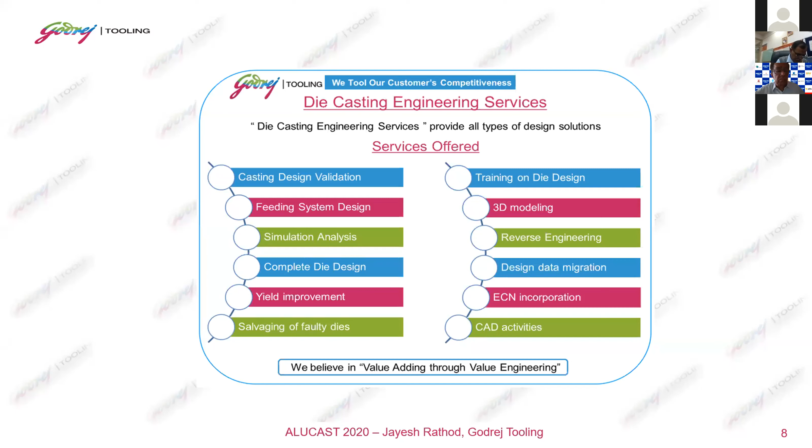We are also sharing our learnings through engineering services adjacency to enhance capability and technical know-how of fellow organizations, and we provide pre-engineering services to mature product designs by R&D centers of OEMs before release for tool development. We also provide tool management services to impart art and science of die maintenance.

Coming to today's topic, changing customers' requirements and triggering technological transitions. I have divided this into two parts. First, let us understand the changing customer requirements. In line with our mission of building customers' competitiveness, we have to look at the bigger objectives that our customers have to pursue and align to their needs.

Our customers are pursuing environmental degradation issues and global warming, conserving earth materials, clean air, and safe products and operations. In die casting, we are mainly aligned to the auto sector, so today's discussion will be based on challenges faced by them and how we can help them achieve the set objectives. There are 5 ways: zero emissions, better fuel economy, weight reduction, resource saving, and minimal effect on environment. Let us first get to know what is causing the changes in the automobile industry.

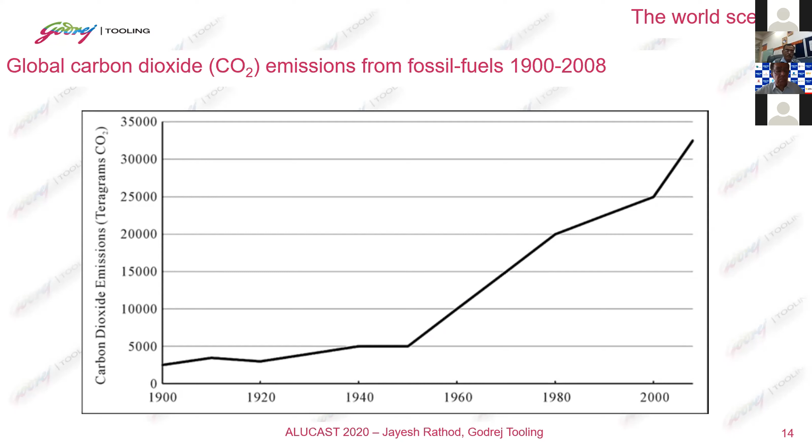The effect on environment due to CO2 emissions started quite long back. If we track it since 1900, for a whole century, there have been carbon emissions. 1 teragram equals 1 trillion grams of carbon dioxide released in the air, and in a century it has increased 13 times, causing enormous impact on planet Earth and living creatures. This extraction of fossil fuels in the last century has damaged the environment irreversibly.

In order to control the damage further, accelerated stringent norms are being enforced. We can see how BS4 to BS6 norms came into force within 2 years with bigger improvement objectives, in the range of 25% to 68% and 82%. These were drastic targets, and industry has responded well and achieved them. But this is not sufficient, because fuel economy also should go up.

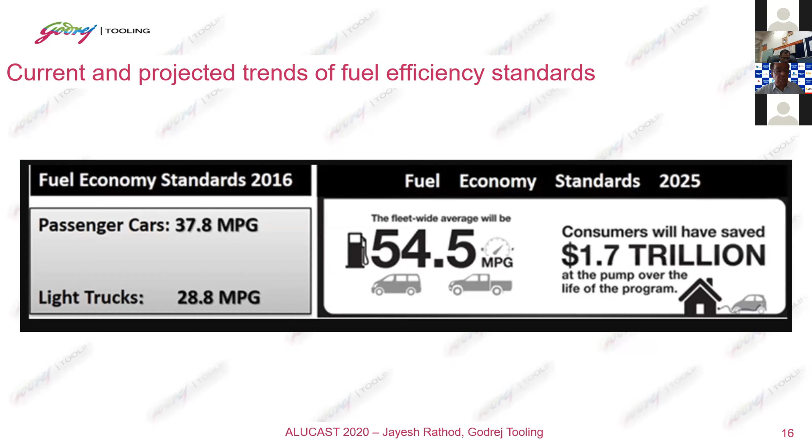In 2016, for passenger cars in the USA, fuel economy was 37.8 miles per gallon. Now it is slated to reach 54.5 miles per gallon by 2025. Similarly, more stringent targets apply for light trucks. So 45 to 90% improvement is needed with respect to fuel economy.

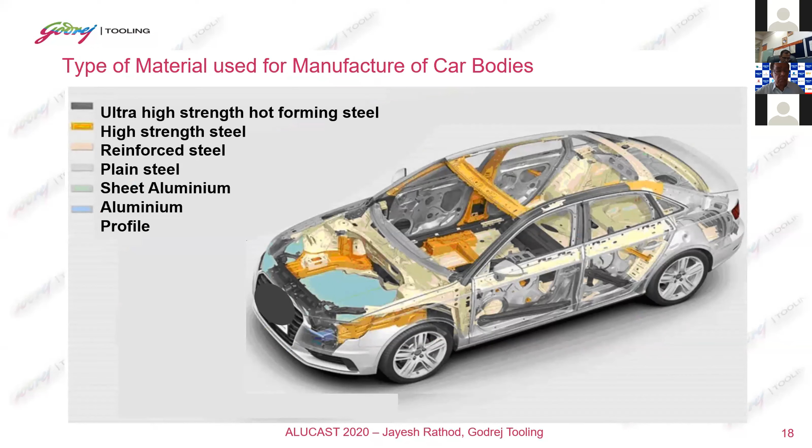If we drill down further, we can see the type of material used to make these body structural parts: ultra high strength hot forming steel, high strength steel, reinforced steel, and very few aluminum profiles. This was the case around 3-4 years back, and the contribution of aluminum alloy was only in the range of 9%.

This 9% was what was available to us in aluminum die casting to contribute to automakers. Moving to weight reduction, we can see how each auto OEM has responded to this requirement. The initial saving was 50 to 100 kg per vehicle. Now it has been targeted to 200 to 325 kg - an improvement in the range of 172% to 580%.

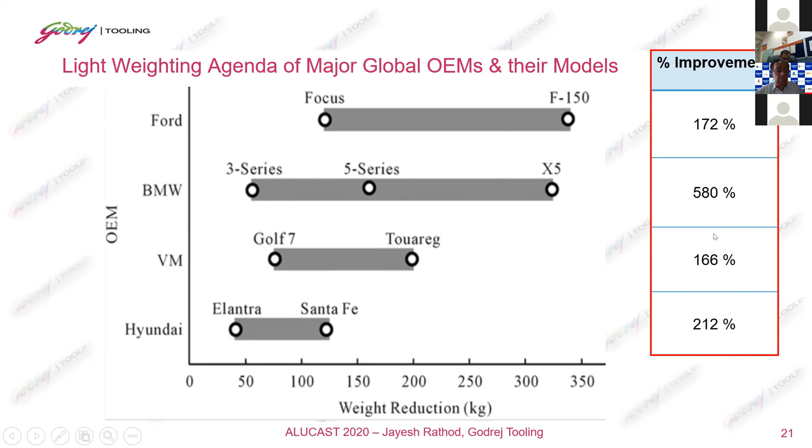These are very aggressive weight reduction programs being pursued by auto OEMs. Looking at what's happening in our country, I tracked down examples like Honda, TVS, and Hero - the difference between old models and BS6 models. We can see weight reduction in the range of 1 to 10% has been done by all the two-wheeler OEMs, most aggressively by Suzuki.

10 kg of extra flab has been removed, achieved by making the engines lighter by 6 kg. It's a huge tall order to reduce engine weight by 6 kg. Based on this, these actually form the challenges to the die casting industry. I drilled down further into how this engine weight can be reduced.

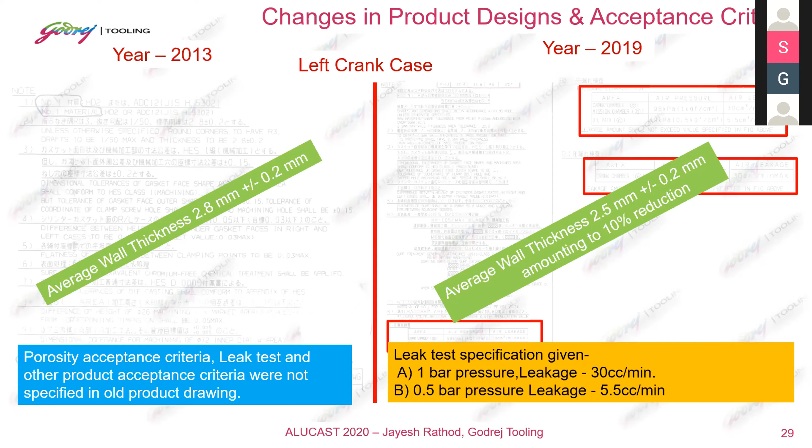Looking at the average wall thickness of the left crankcase of a two-wheeler, it was 2.8 plus minus 0.2 - that was the tolerance given in 2013. Now it has come down to 2.5, around a 10% reduction in section thickness. You can imagine what the total weight reduction will be with respect to this.

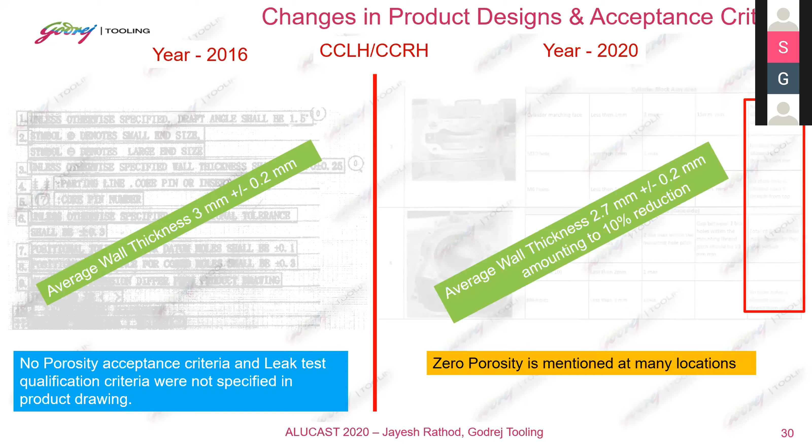Earlier, the porosity acceptance criteria was not so stringent and was never part of the contract. But currently all auto OEMs want leakage testing done, and specifications have been put on paper as order conditions. These are figures from another two-wheeler maker, and here also we see a similar story - around 10% reduction has been planned, with a very strict norm of zero porosity in the CTQ areas enforced.

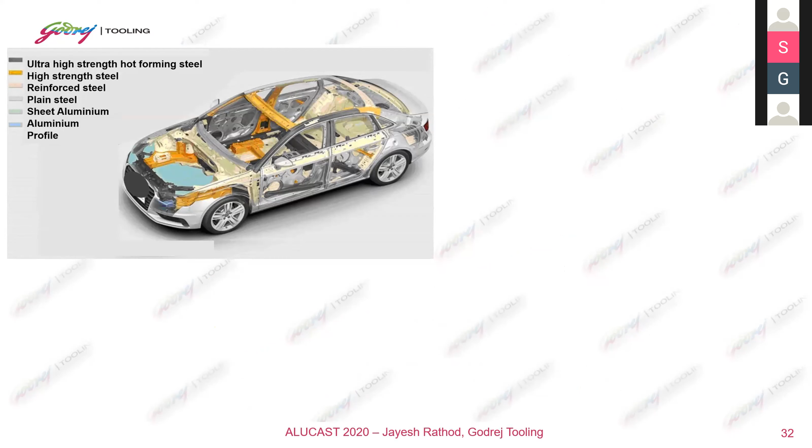If we look at here, it shows mainly aluminum derivatives or aluminum type of components, which will contribute around 58%. And these are the more radical steps which have been decided by auto OEMs to achieve the type of weight reduction they have planned. It sounds as sweet music to we all in die casting, but it comes with a lot of riders and a lot of challenges.

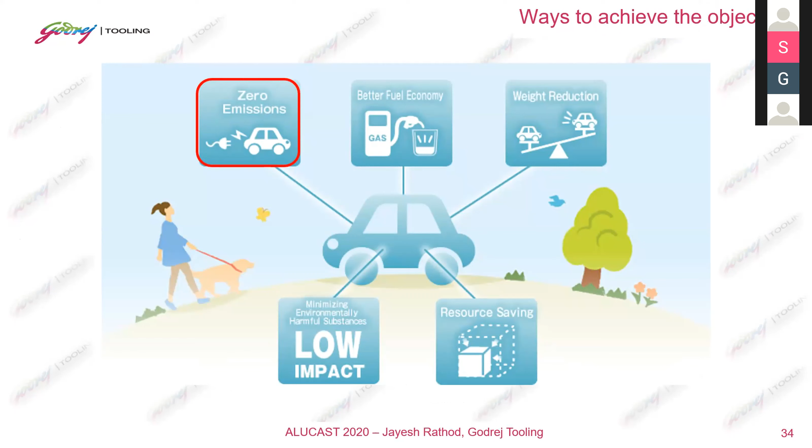So next target by OEMs is zero emissions. Zero emission - whenever any IC engine is there, some amount of emission will be there, we all know. But when the target is about zero emission, then I had gone through a detailed study that we are contributing mainly to parts of IC engines in aluminum die casting.

You might have seen in today's Times of India a big single page advertisement by Ather 450 Plus. That is giving us an idea of what is going to come in future. Now this is a study done by Bloomberg that IC engine is going to be history, because the contribution of IC engines will be very low in near future, and it will be quite subdued also, and it may become obsolete, and it will be replaced by electric vehicles.

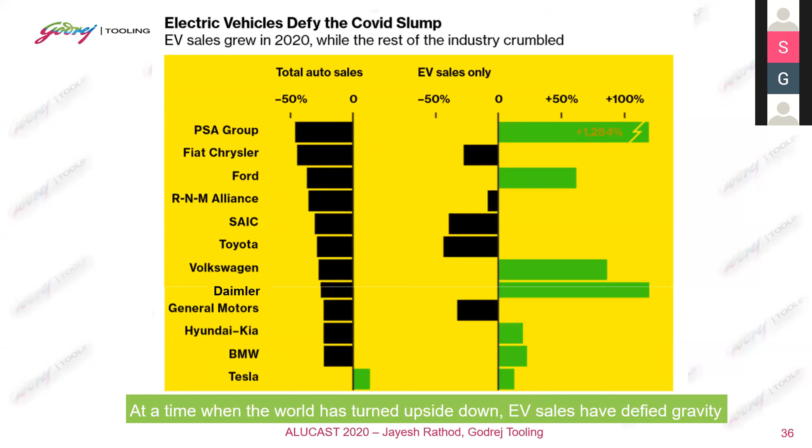So I thought let us look at what is happening for EV sales. Globally, if we can look at it, the silver lining for EV is that even in this pandemic, when the world has turned upside down, EV sales have defied the gravity and pose a strong growth path here, even though it's on lower volume, but people are showing more and more interest in this pandemic situation.

So I try to capture like what is happening in India. In India, the EV market is totally different, because 90% of Indians are traveling on two-wheeler, three-wheeler and buses. And these are the larger sector where government will be imposing stricter norms and encouraging industries to develop more and more EV products here.

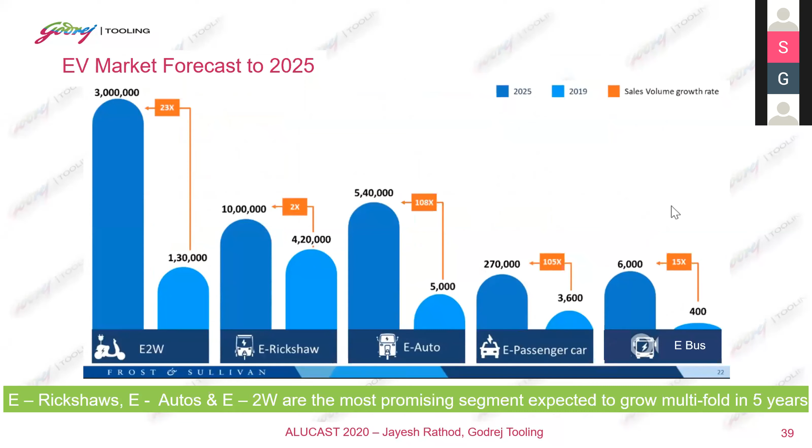So EV will grow in India, especially by 2025. And also we see that e-rickshaw will have a strong business case, and car and buses will have more time to wait until the single charge kilometers are enhanced. And we are seeing that there is an upsurge in electrical two-wheeler market - Ather, as I mentioned today, then Bajaj Chetak, we all know, TVS, SEG Automotive, and Ola Electric Mobility.

So if I look at what type of parts will be needed, especially with respect to aluminum casting - those are currently battery boxes for two-wheeler being developed in the country. And some portion of structural parts for two-wheeler are being developed, but in a major way, we will be seeing this demand for these type of parts by 2023 to 26.

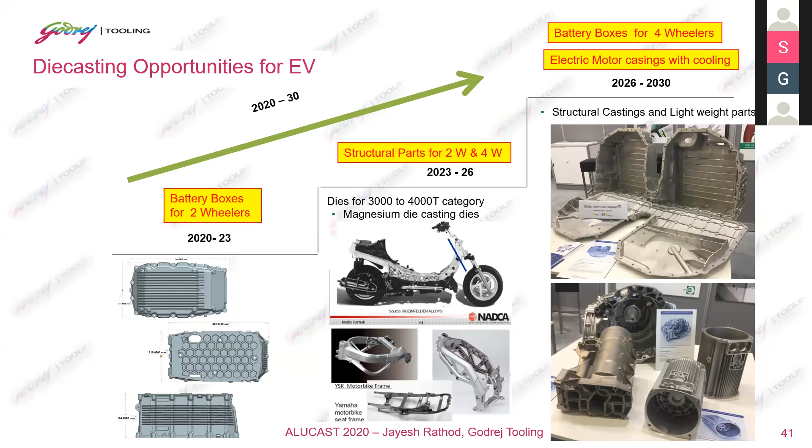In the meantime, we will also be enhancing our capability to serve battery boxes for four-wheeler, such large type of castings, and electric motor casing with cooling arrangement inside. So that makes castings quite complex to achieve. And if we think that it may get advanced more than expected - these time periods were derived around 2 years back, but we are seeing that the way the market is moving, we may require to tighten our belt and capability quite faster than expected.

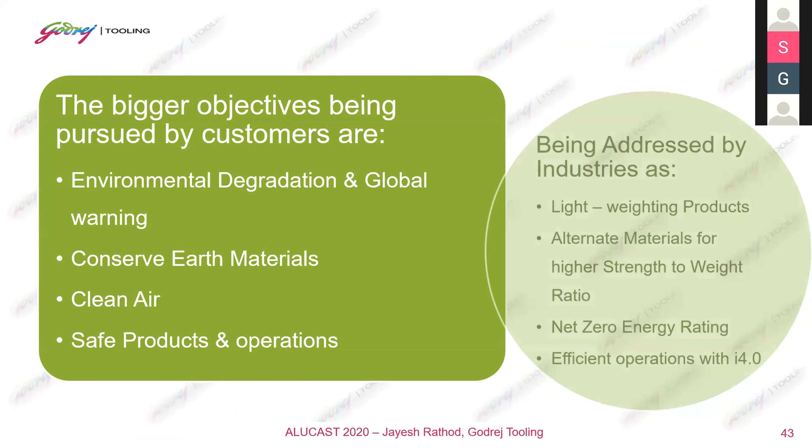So these are the bigger objectives, as I mentioned, and how industry is responding to it is with lightweighting products, alternate material, net zero energy rating, and efficient operations in Industry 4.0. So we have to see what it entitles us and how we can trigger these technological transitions in our favor.

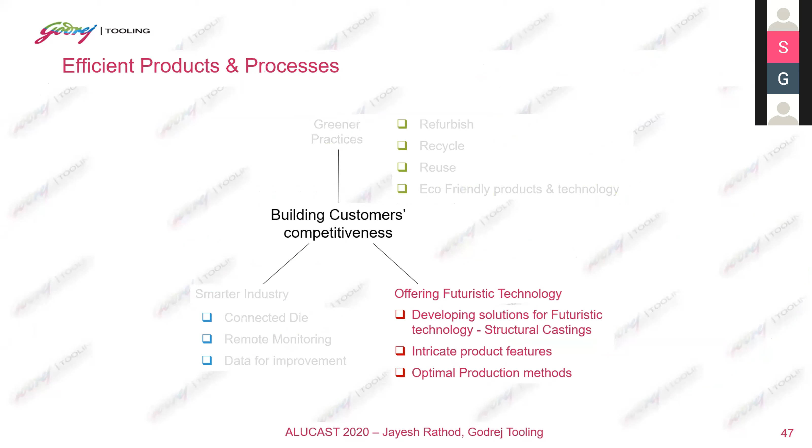So now coming to the second part, that is triggering technological transitions. During past Alucast conferences, I talked about greener practices and smarter industry solutions. And today I will focus my presentation on offering futuristic technology, and that is for developing solutions for structural castings.

So structural castings process chain is shown here. It is having some more steps added, which have been marked with red boxes. Alloy preparation becomes a very critical phase here in structural casting. Then treatment like degassing, concealed molten metal metering system, vacuum systems - these are the newly added steps.

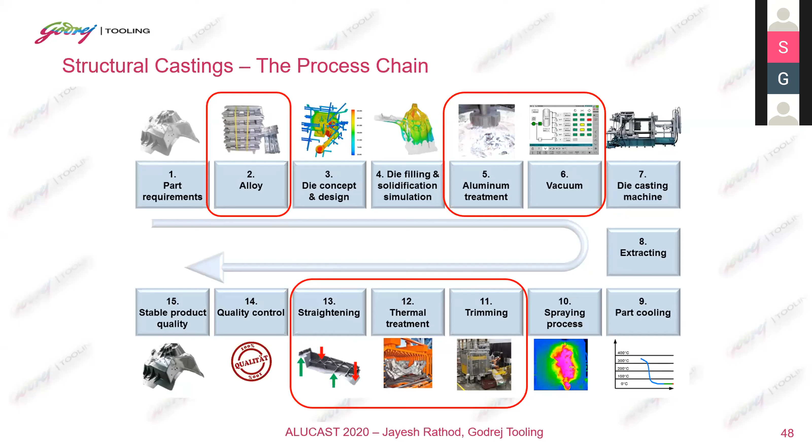And in post casting, then trimming, thermal treatment is of course everyone is aware about. And straightening - if the part is thinner and longer and having varied section, then there will be a lot of warpage. So we will have to correct that also, so as a process, that step may be required.

The structural casting alloys are characterized by higher elongation ratios. Currently, elongation ratio is 0.5 to 1.5. But for crash-relevant and strength-relevant applications, it should be more than 10% and 7%.

So we should understand the specific characteristics of structural alloys. Structural casting has to be thin wall casting with quite a larger area, and it will have complex ribbing structure as shown here, and it should bear static and dynamic load requirements. In order to impart better mechanical strength, the alloy should be heat treatable.

That is a necessary condition. Weldability and riveting properties will be an additional advantage. But when we look at weldability, it requires porosity-free casting, because even pinhole porosity will not be allowed here. And the lower Fe content will be tough to handle during filling and ejection stages.

It is mentioned that lower Fe content entitles to die soldering, and that starts creating problems for us, because a lot of warpage can be seen, or casting may not be able to come out of the dies smoothly and easily.

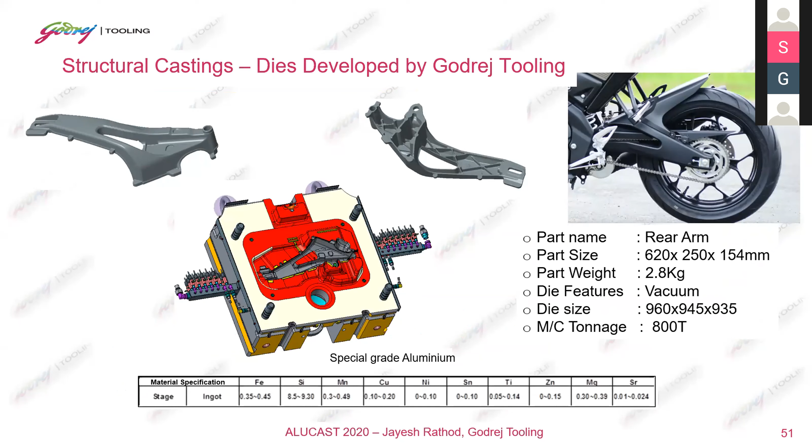Just want to share that in Godrej Tooling, we have developed structural dies for a structural casting part for two-wheelers. This is again a load bearing part, and the grade of aluminum is quite different than what we use in ADC 12. So how can these challenges be met?

If you look at what technologies are available with us, so that we are able to meet the specific requirements of structural castings, it starts with vacuum die casting technology.

The vacuum die casting technology, why is it to be employed? Because we wanted to have zero rejections, and we should address all the quality parameters of complex castings, and achieve porosity-free castings during trial and production run.

So we will show a small video, just to depict how the vacuum technology works. In the first phase, that is metal pouring. It starts off as a slow shot.

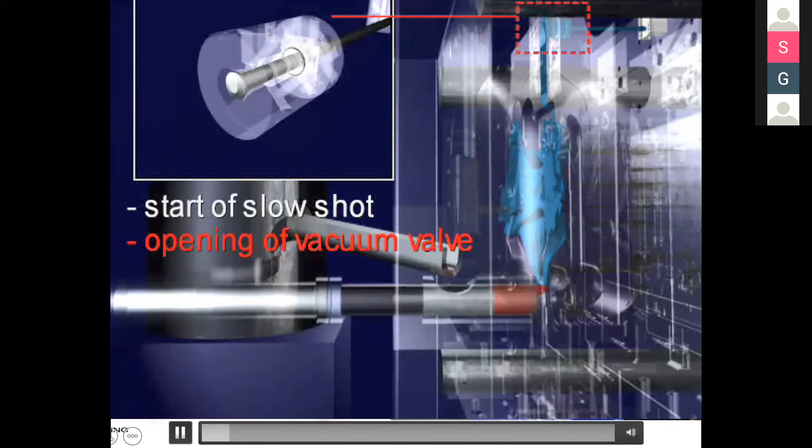When the shot sleeve is completely sealed, then the vacuum valve opens and sucks away all the air inside the cavity. That evacuation happens at the other end through the chill vent in this case. Then closing of the vacuum valve, and then start of the second and third phase, which is the faster phase. This is how vacuum technology works.

I would like to share a very interesting case study for the component and die developed by us. Originally, it was an LPDC part with very heavy and thick sections, owing to the constraint of LPDC as a process and also the product requirement with respect to load criteria.

We converted that into HPDC with 20% lesser weight, performing the same function and meeting all the quality and strength criteria. But because of the varied sections and the type of alloy used, it was quite challenging to fill the casting and achieve the level of porosity indicated by the customer.

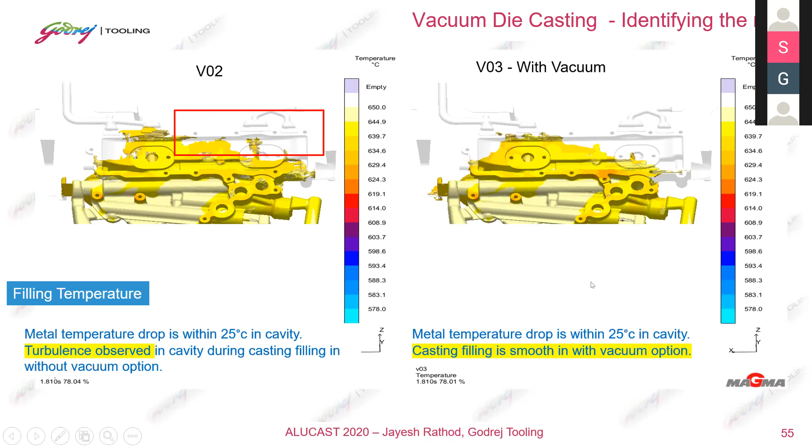I will take you through what we did during the development phase. For filling temperature, without considering vacuum in the simulation study, turbulence was seen. When we applied vacuum, casting filling was smooth.

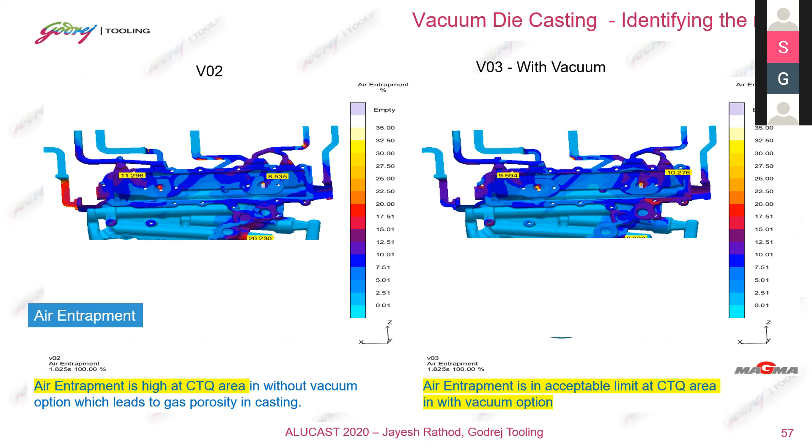Then we took the cut section where we could see gas porosity as seen in the simulation study. With the vacuum system, the porosity has been completely avoided in this area.

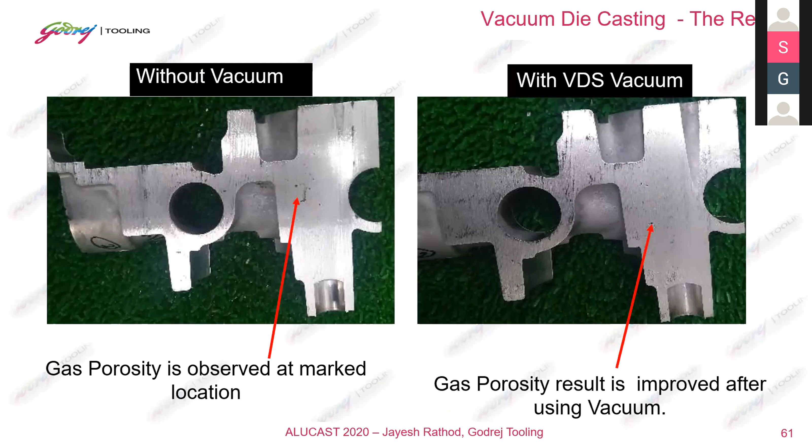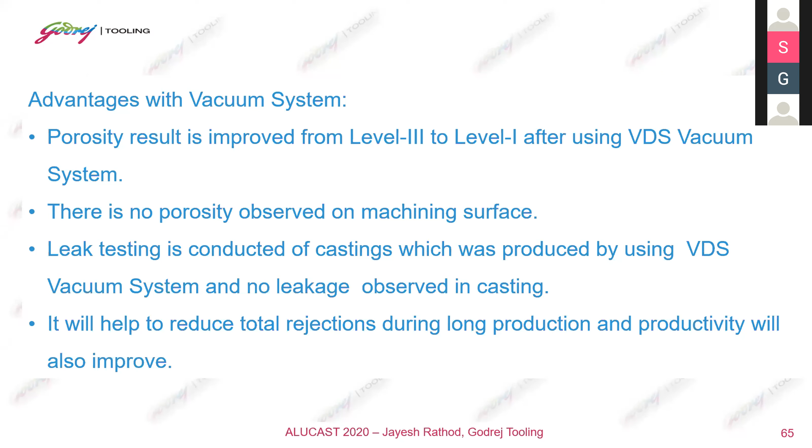Advantages with vacuum system are that level 3 to level 1, as I mentioned, and especially in all machining faces, there is no porosity seen, and leak testing is also conducted, and there was no leakage observed. Total number of rejections during mass production is definitely going to go down to the level which will be acceptable to foundry and to our customer ultimately.

Another technology which many of us are aware of, but I just wanted to mention in passing, is the jet cooling technology. So in Godrej tooling trial setup, we have VDS vacuum system, as I mentioned, and then jet cooling also, so that thinner holes can be easily provided in the casting along with cooling.

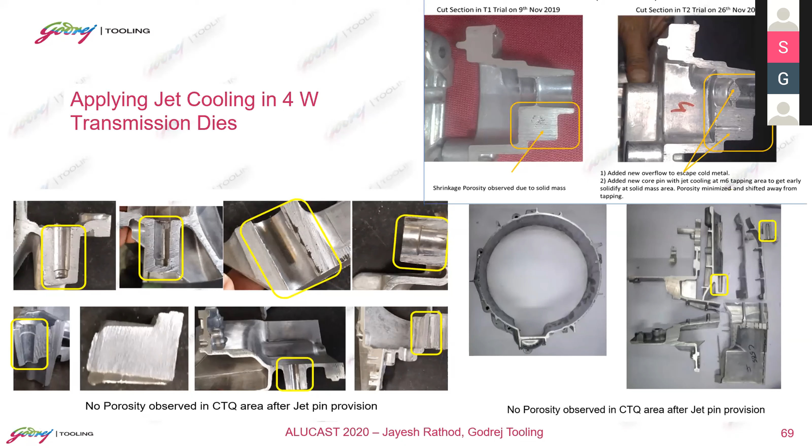And if we look at minimizing environmentally harmful substances and having a lower impact, we know there are advantages of aluminum and disadvantages of aluminum. But industry has not stopped here, and in fact it went on developing newer and newer materials.

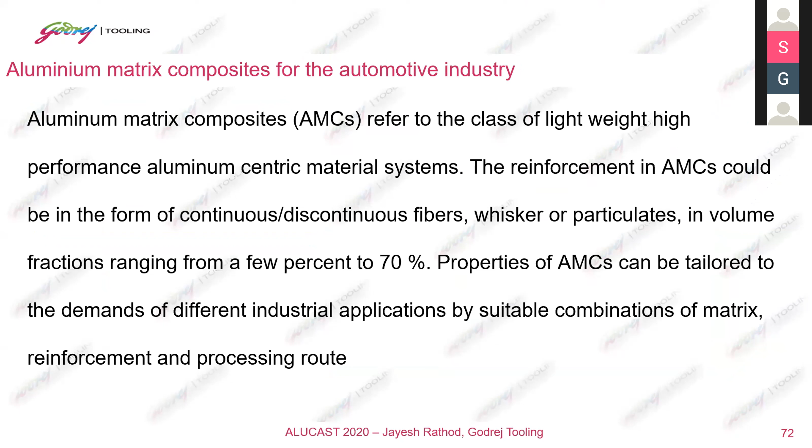So besides structural casting, there is a material called aluminum matrix composites. These are reinforcement of AMCs with, say, fibers. With the help of fibers, we are able to achieve these types of structures, which give us a quite rigid section at a lower weight. So the advantages are greater strength, reduced density, improved temperature properties, and enhanced thermal and heat management.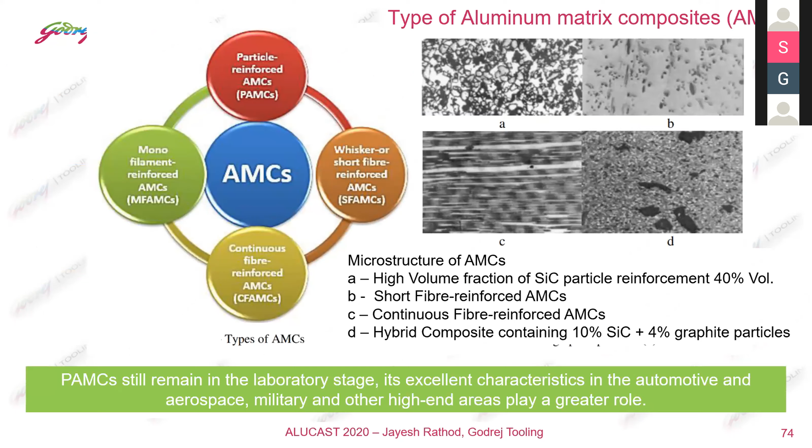There are 4 types of AMCs: particle reinforced AMCs, whisker or short fiber reinforced, monofilament, and continuous fiber. Many of these are under laboratory stage, but some have been picked up by industry and started being used for aerospace, military, and even automobile applications.

We can see that as compared to cast iron, 50 to 60% weight reduction is possible in brake disc type components, which has been used by Knorr-Bremse. Also look at other examples, Kolbenschmidt and Toyota, who have started using this type of AMCs and gaining the benefits.

Now, in our country, how fast will this technology arrive? I am sure all this technology transfer is going to happen very fast. Volkswagen, Toyota, and Knorr-Bremse are all involved in this. So we have to be careful and watchful about what is going to come in future for us.

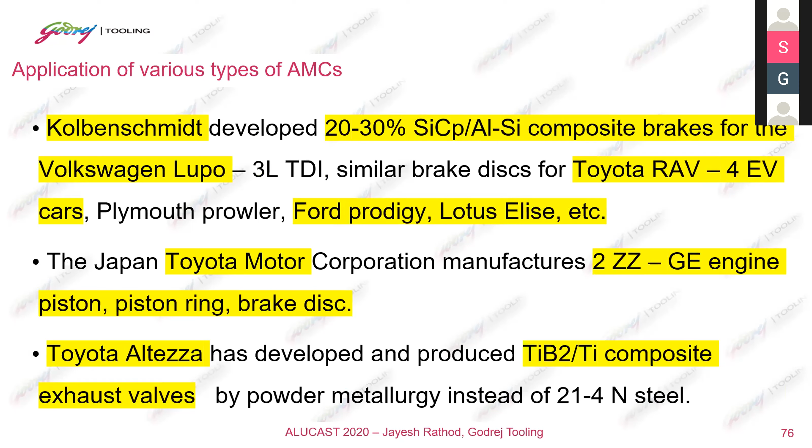So to conclude my presentation, the challenge for the aluminum industry is alternate materials and processes. They keep challenging us for lightweighting and weight-to-strength ratio. Many times that type of newer technology becomes a winner and a very strong contender.

Our customers, especially for structural castings, expect us to raise our level and meet their tougher standards without committing any business. First they want us to invest and come to that level, and then this will be awarded. Now our approach should be meeting higher quality standards set by the customer.

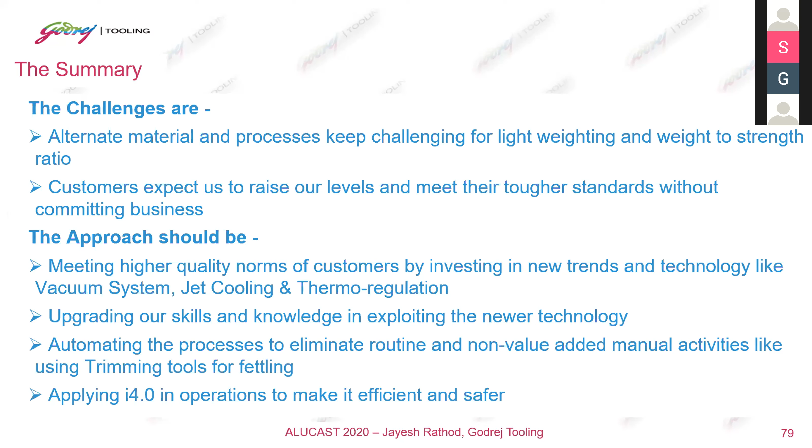So this was all about me, and thank you for your attention. I would be happy to address your queries.

Thank you very much, Mr. Rathod, for an in-depth deep dive into the challenges forthcoming in the automotive industry and how we are going to overcome them. In both these segments, you have touched upon the details of how we are going to accept this. Although it's a good challenge to have, a good problem to have for technology advancement in the country, the challenges still stand there. You've spoken about the raw material, the process, the dies, and also the treatment. So as die casters, we see on various platforms the latest breakthrough made by Tesla Motors on the Model Y, where they cast the complete chassis frame with the strut column and shock tower in one piece on a 5,500 ton machine. It's a beauty to see that. But how well that will be accepted and how we are able to further take it on is the challenge. So thank you very much once again, and we are open to questions.

So we have a couple of questions which have come in. The first one is from Sandeep Kumar. He says that normally filling issues are related to the function of temperature. How can air pressure create a non-fill?

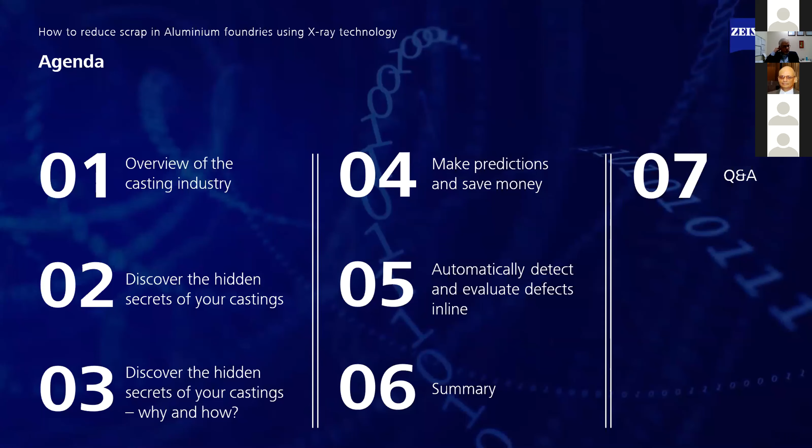So we'll move on to the agenda. This is how the overall agenda will be. We'll touch upon the casting industry overview and what are the hidden secrets of castings, how we try to find these secrets, what kind of predictions we make to save money, and how to detect these defects automatically in line to save money. That is one of the key topics of my discussion. Finally, an overall summary followed by the question and answer session.

After this presentation, the overall information the audience will receive is how to identify defects early in the casting process, how you can safely increase the quality of your part, reduce the scrap, and also reduce the cost of the complete manufacturing process.

Everybody is aware there are different casting processes depending on the part and its complications and profiles. There are different manufacturing processes, from sand casting, gravity casting, pressure die casting (low and high), to lost foam process and investment casting process. Further, it goes to post-casting processes like machining, and then moves on to the assembly phase. So in the whole value chain, these X-rays are going to be used, and we'll come to that topic. These are different parts which get manufactured through different manufacturing processes.

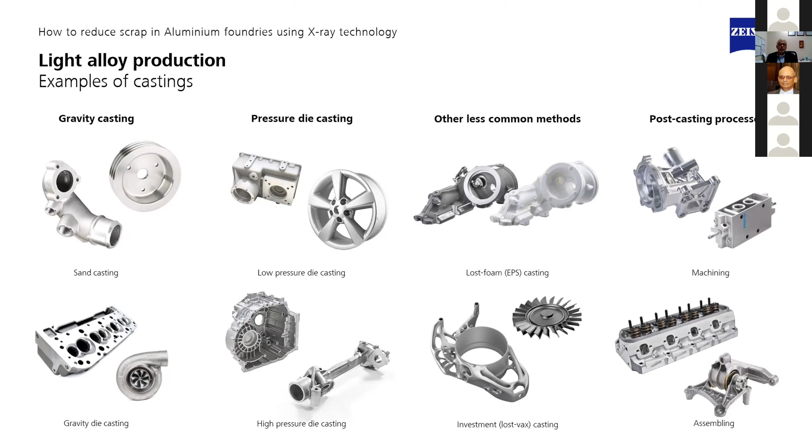Some parts are produced using sand casting and gravity die casting. Wheels, of course, use low pressure die casting, and high pressure die casting is used for steering columns and things like that. Each different process is set for each different application, and they have their own challenges in terms of pores, shrinkages, and so on. So each production process has got different kinds of defects, and these have to be identified in advance.

So how do we identify these secrets? If you look at the casting process, these are familiar terms you'll normally come across: cavities, pores, warpage, cracks, residuals. Each has its own implications on the product. Some seem less critical, and some parameters are more critical. It depends on what kind of part and process you're following, and what is possible for customers to allow in terms of defects, because producing 100% defect-free parts is out of the question. So we decide which defects we can allow and which are not, early in the manufacturing process.

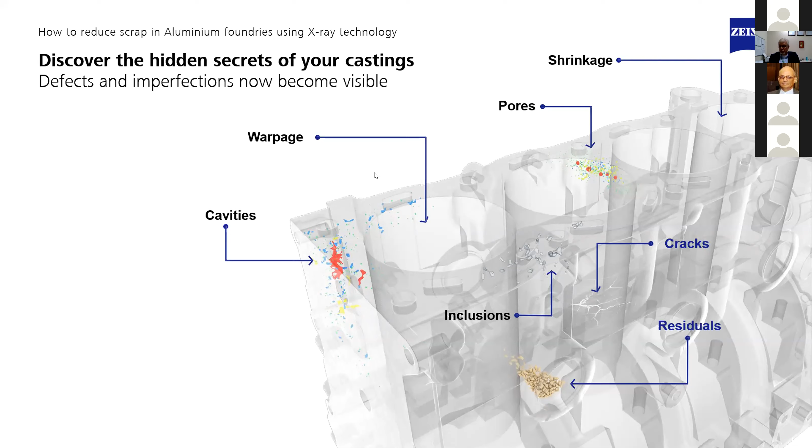So if you look at the problems in casting, some of them are internal and some of them are external. These are examples which I'm trying to show you. These porosities - these are the perennial problem in casting industries.

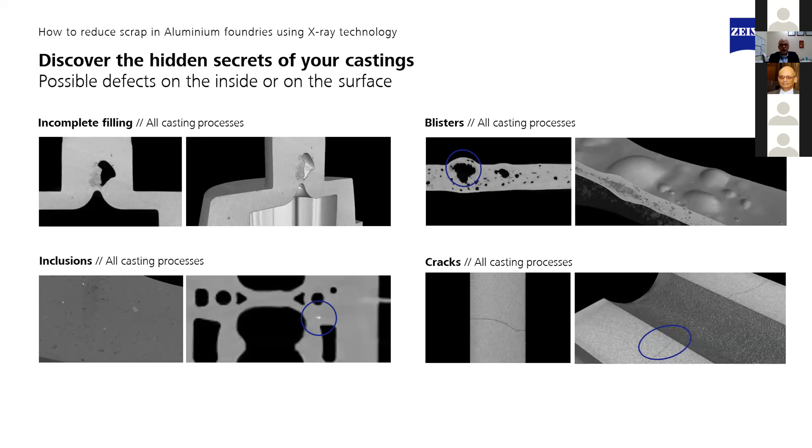Shrinkage holes, then spongy areas, then cold shuts - these are the defects which mostly happen inside the component. And incomplete filling - I think the last session was more on this aspect, how to reduce this - then blisters, then inclusions, and the cracks.

So these are the defects which you normally come across in the casting world. And some of them are external, like if there are some flashes or sink marks, or there can be sand entrapment and broken core. And sometimes the chips.

So these are the issues wherein the size of these particles sometimes can be somewhere between 500 micron to 1.5 millimeter, and it can create a lot of problem when the part goes to the final assembly. So these are the issues which the industries are facing.

And the X-ray topic now basically also addresses certain measurement functions. So not only on the defects, with X-ray technology we can also find out what are the geometrical deviations, and if there is any movement in the sand core, and if there is any shift. So those drifts can also be identified by using this X-ray technology.

So these are the different problems and issues, and how we can address them by using X-ray is what we'll see in the next slides. So now the present methodology is basically you use a borescope to see the internal defects, and it's a manual process.

It takes a lot of time. Or what you do is you cut the part, cut the sample, place it under the microscope and see those defects. Or you also use a 2D X-ray machine and identify these defects. This is what is currently widely used in industry.

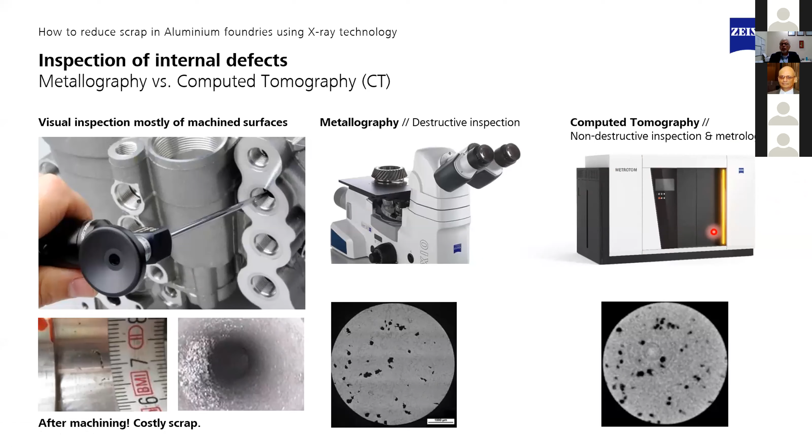So this is how a 3D X-ray image will look like. And we collect this information on very high precision mechanics, so that we say the resemblance of this image is very close to the original image, to an order of microns. That is where 3D metrology X-ray comes into play, creating an image close to the real image.

And the disadvantage in 2D images - for example, in a 2D image you will always have to make a judgment based on a single plane. Because if you have a source and a detector, you take one single shot, meaning you take one image, which is projected onto the screen. And based on this, you'll have to make a judgment.

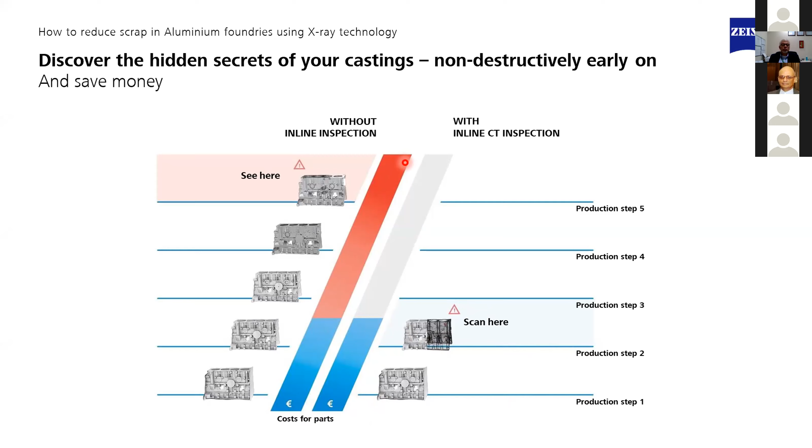So this kind of judgment can be made when you use X-ray technology.

So at Zeiss, we basically have 4 corners: we have systems in place, software, accessories, and services. Depending on the customer's application, we have suitable systems.

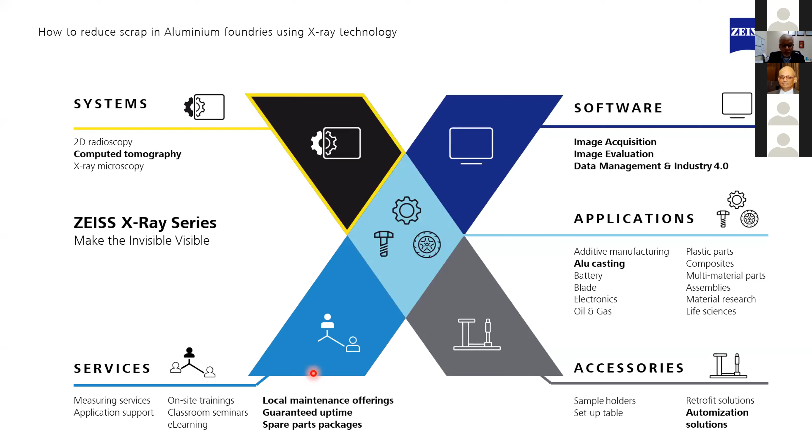When it comes to systems, we have Metrotom, which is a lab-based system - if you're interested in random sampling, we can use this. This is an X-ray system used for research and development, where resolution gets down to sub-micron level. It's mostly used in research labs.

Today's topic will mostly cover VoluMax, where these machines are installed inline, meaning they can be placed directly onto the shop floor. The difference between a lab and shop floor machine is that in the lab, we have to maintain 20 plus or minus 2 degrees C, like CMMs or other metrology machines. These machines are made for the shop floor and can withstand up to 40 degrees C environment.

Apart from that, we also have 2D systems. Again, 2D has certain limitations, but we also offer a 2D inline system for shop floor application. So today we will cover mostly the VoluMax 3D inline system and the 2D inline system from the Bosello product range.

So what's the biggest challenge when it comes to scanning this part? It's basically the kind of data you have to handle. When you talk of 3D data - in CMM we call it a single point, but here in 3D we call it a voxel. A voxel is nothing but 3D data, a small representation of each coordinate. And when you scan a big part like a cylinder block or cylinder head, you end up with 4 billion voxels - the total voxel size from each scan.

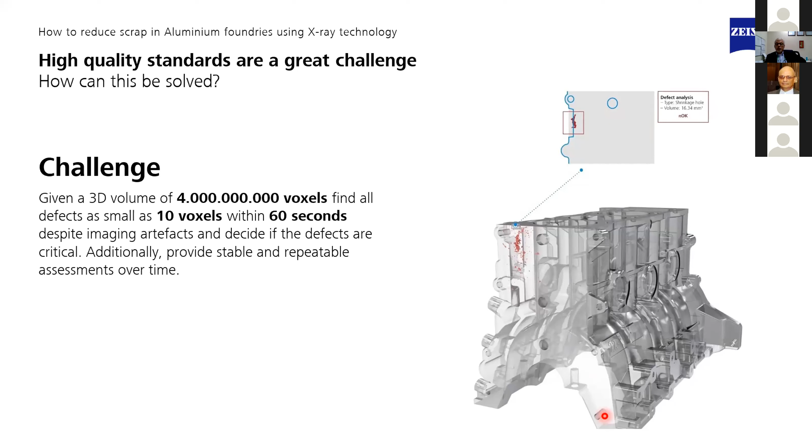And for inline applications, the cycle time requirement sometimes ranges between 45 seconds, 60 seconds, to 1 or 2 minutes, depending on customer requirement. So if you have to take a decision in 60 seconds, and analyze 4 billion voxels, that's a huge amount of data. But we've developed certain software features - artificial intelligence built into the software - by which we can accurately pinpoint the defect's size, orientation, and dimension.

So loading can be done using a robot, or there can also be a conveyor type system. So for the shop floor, you can have different types of loading systems.

So normally we ask for the requirements from the customer - what are the important parameters to be checked, what is their interest, what is allowable and what is not allowable, because a defect-free part, as I mentioned, is not possible to manufacture.

So we take all this information beforehand, then we do a thorough performance study of your part, and then we provide a suitable solution. So everything we do, we customize the requirement based on the need, and then we provide the total solution.

So here we can do fast scan, because this new VoluMax 9 flash is a fast system. Earlier, the same cylinder block we used to do in 90 seconds. Now the same thing we are doing in less than 60 seconds. So the throughput of these machines has increased, because this machine was introduced about 6 or 7 years back in the market, wherein it started with a 2-minute scan. Now we are already talking about less than a minute for the scan and then the result.

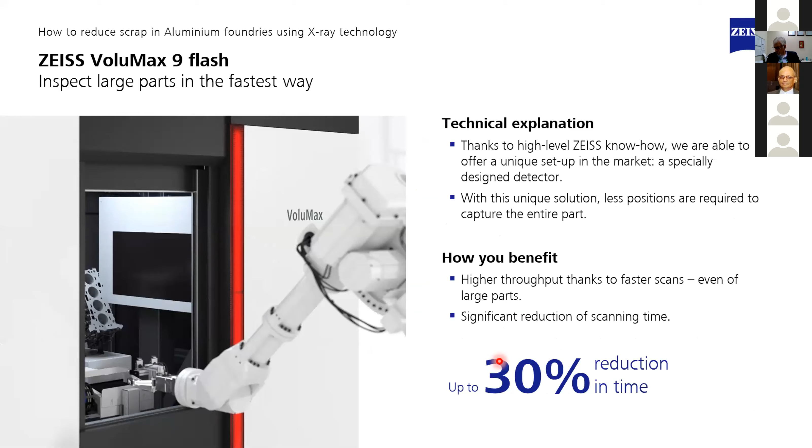So where is it placed actually? When you look at the casting process, after the casting is done, there is cooling, then decoring, then pre-machining. It comes for CT inspection before it goes to machining, so that we always ensure that only good parts are supplied to the next level of process.

In the next slide, I will present a small video which gives you total information about how the whole thing will work.

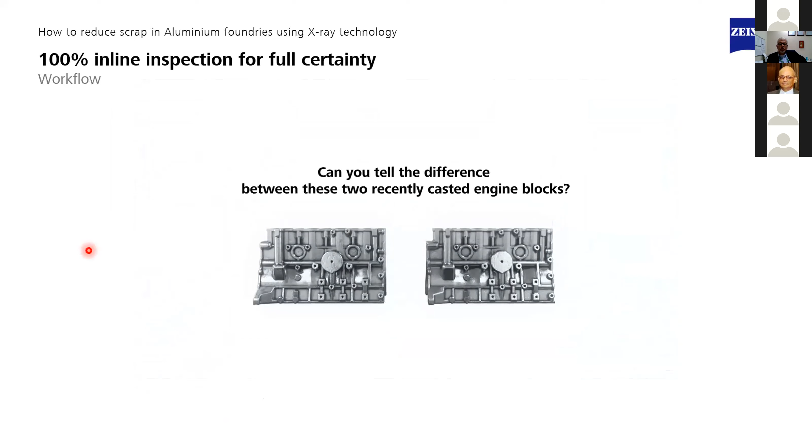So this is a normal case. After the pouring is done, what happens?

So now you introduce an X-ray machine inside the production.

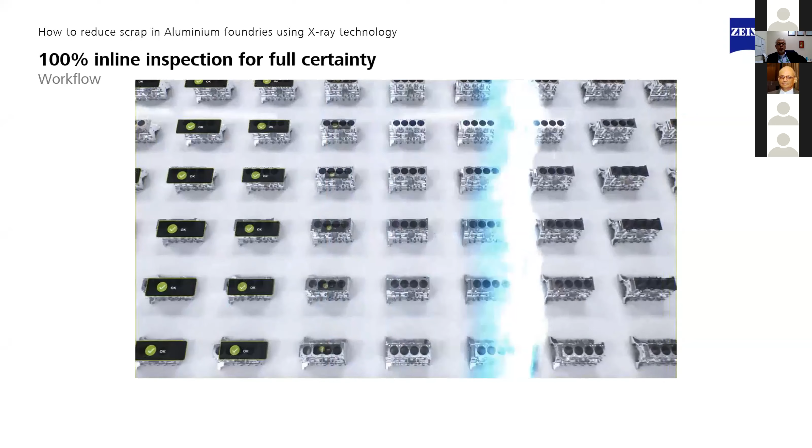So that's how it is done. You have seen, if you place an X-ray machine on the production floor, then what happens? You always ensure that the right part goes to the next production phase and not the defective part.

So how do we do it? Because, as I said, the amount of data we collect is enormous. So we introduce -- Zeiss has done a lot of research on this, and we have built certain software features into our ZADD, that is Zeiss Automated Defect Detection software.

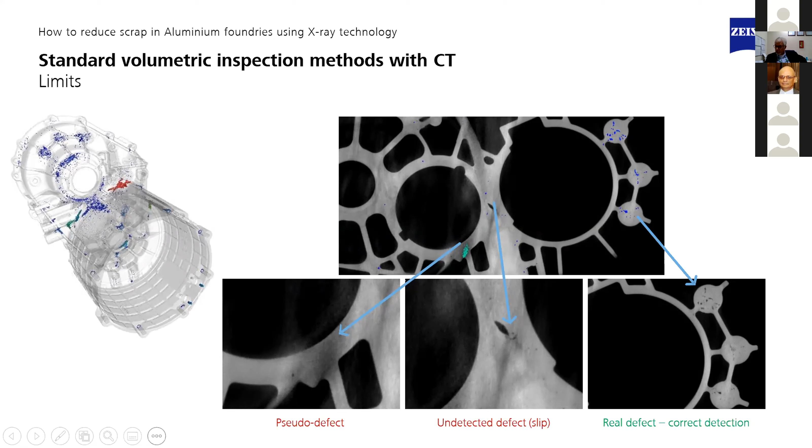The goal of the software is, normally when you deal with such high volume data, you always end up giving wrong information. So how do we ensure every time we give the right information to the machine, so that the perfect part goes to the next phase? It is not so complex -- what we have done is just developed simple algorithms.

We develop an algorithm that works on a reference basis. So if you scan a part and find some defects, how does it make an analysis of that? This is a reference which is normally created by using a lot of good parts or allowed parts, and then you create a reference.

Then you do a superimpose -- this is actually basically child's play, which I think most of us are familiar with. When you superimpose and see what are the deviations, then the AI which is built inside the software will do the classification and segmentation accordingly.

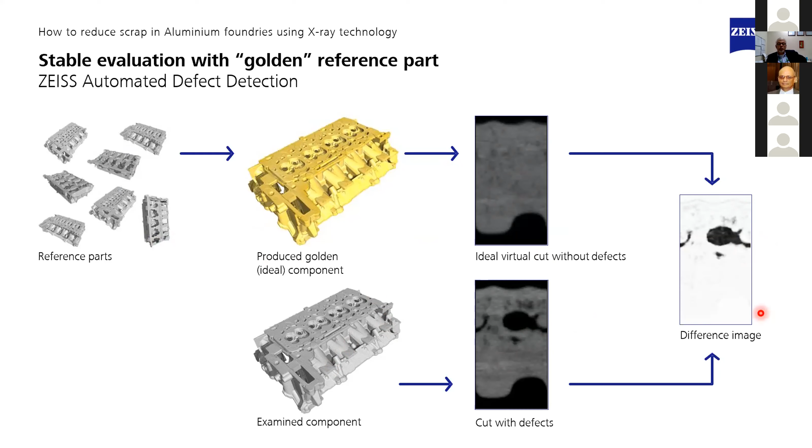So how it is done -- as I said, none of the parts are defect free, but we have to identify a few parts which have allowable defects, then create a golden part. Once the golden part is created, then after the data is scanned on a new part, you scan this part, then superimpose and subtract the image. The difference image gives you the defect, and after the defect is found, we have to do a classification -- what kind of defect is this.

This is basically done from more than 60,000 data sets. This is how the AI has been created. Then it does a segmentation, and the system takes a decision whether it is okay or not okay. The whole thing can be captured in PiWeb, a statistical software.

So in the first step, we try to find out what kind of defect it is, whether it is an internal defect or external defect, like sand core or chips entrapped inside the casting. Then we identify what type of defect it is - residual, core breaks, sand, or pores. All this analysis happens in the back end. When the scanning is done, this whole thing happens in about a minute.

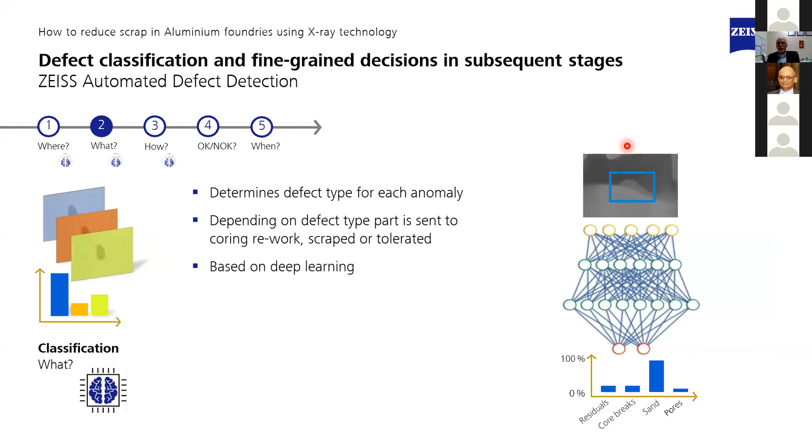After that is done, it will also do the measurement - what is the size of the defect. Then it gives you a complete plot of different types of defects.

For every part, there is some tolerance scale, so we can fix this tolerance scale when we do the customization of the software. This is not only done during the manufacturing of the machine. This software is completely flexible, and it can be adjusted even after the machine is installed at your customer's facility.

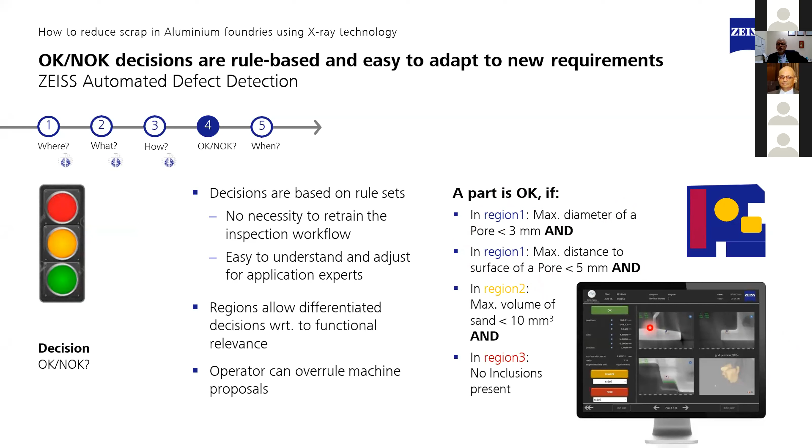So all this tolerance band can be fixed, and we can say that on the same part, some areas may have close tolerance and some will have an open tolerance. On the whole part, we can create segmentation, and accordingly we can say whether the part is acceptable or not. The complete thing can be programmed in the software.

The other beauty of this software is the whole thing can be captured in PiWeb software, so you don't have to keep noting what the problems are in each part. This can be taken at any point of time for further analysis. So the benefit is you save a lot of time, you save money, and of course you always give the best part to the next production process.

Depending on the customer requirement, we can program the complete machine. We talk of cycle time between 25 to 30 seconds per part, depending on how many images the customer requires. On average, an 18-inch wheel will take about 30 to 35 seconds for one wheel inspection.

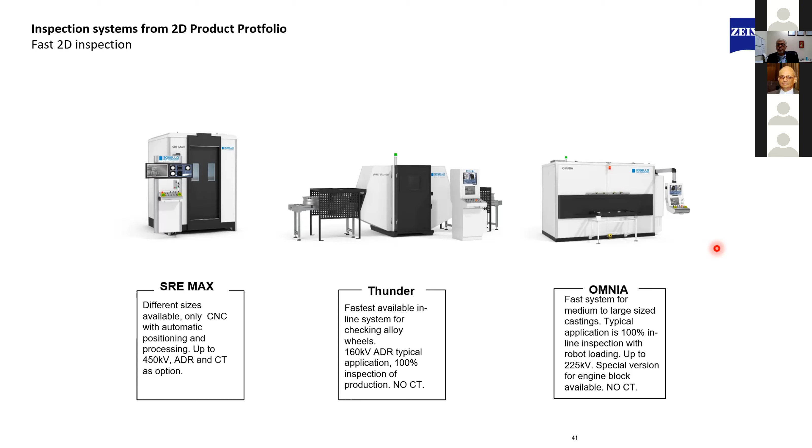This is an Omnia system for prismatic parts. It can be completely kept on the shop floor, and with ADR software you can do complete defect analysis - this is basically only for defect analysis. The 3D machine I talked about can do defect and metrology applications because you're dealing with 3D data. Here it's mostly 2D application because you're taking a decision based on just a 2D image.

So here the facility is you can place the part on a pallet outside, and then the part rolls in. There is already a scanning happening inside the machine. Once the part is ready, this will flip inside, and the part which is already measured can come out. That's how these machines are quite fast.

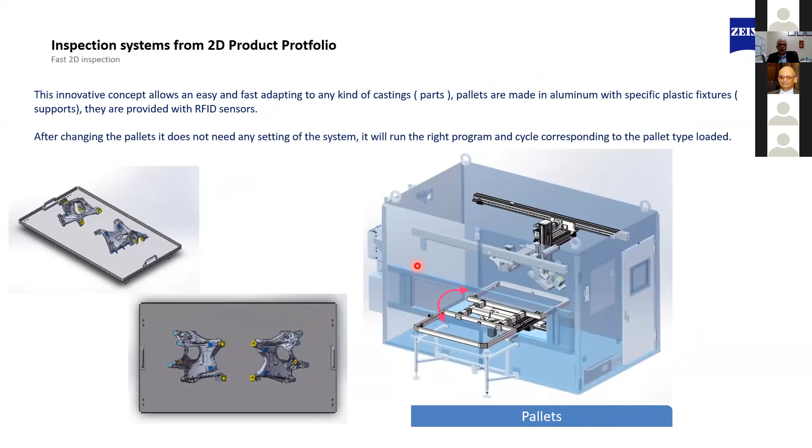As I mentioned, this is how the flip happens. This is how you load the part, then you take pictures in different orientations, and the ADR software takes the decision whether it's a good part or a bad part.

As I said, the wheel machine construction is like this - you have 4 doors, one part is getting measured. The part is standing just next to the door, so that when it's finished, the loading time would be less than 2.5 seconds. Once the part is measured and gone out, the next part will go in within 2.5 seconds, and the next production measurement cycle starts.

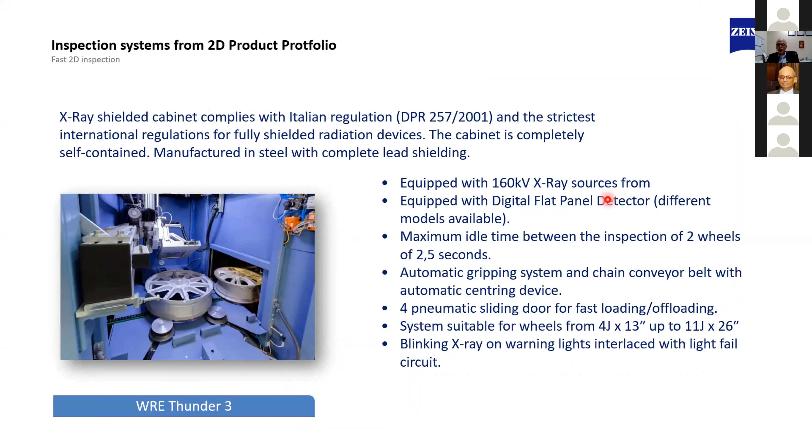So just to give you an idea how fast these components get measured - within a cycle time of 30 to 35 seconds. The power source can go from 160 kV to 450 kV. For example, for aluminum we can accommodate 160 to 225 kV, but 450 kV is basically for high-density material like steel or iron casting, which normally requires 450 kV.

This is about ADR software. I touched upon our ZADD 3D software earlier. ADR deals with a single image, and our ADR software detects the size of these defects based on that single image and takes the decision accordingly.

So in summary, I tried to cover both 3D and 2D applications for X-ray technology, and the advantages. Basically, you can identify defects before the production process. The machine can be integrated completely 100% inline, and it can be used 24/7, needing a maximum of 3 to 4 days of maintenance in the whole year.

For the ZADD software, I explained the advantage of 3D visualization, how it can do segmentation, and how defects are measured and quantified at the end of the scanning process. It can have 100% inline inspection, and by doing this you can definitely improve the casting process.

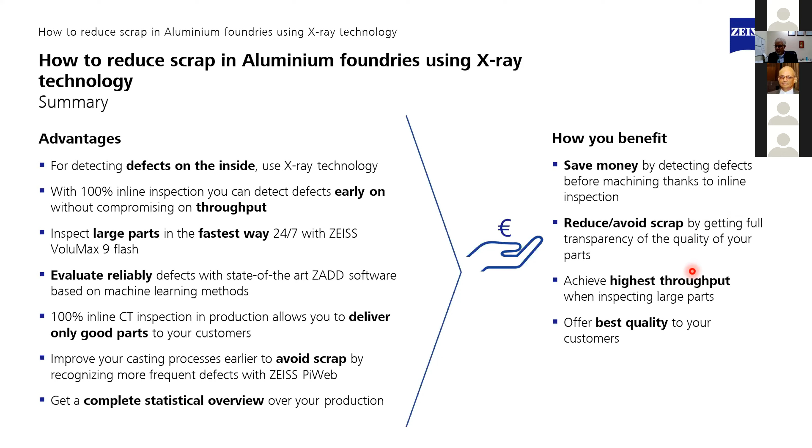Benefits include saving money, reducing scrap, highest throughput, and best quality to your customer. If you deliver best quality, the reliability factor goes up, and you can ensure good customer relations by delivering best quality. So with that, I come to the end of the presentation, and I'm open for Q&A.

Thank you very much, Mr. Hemant, for a very illustrious and in-depth data analysis, and also the use of the X-ray machine online. This could be a dream come true for every die caster to avoid rejections, especially on heavier parts, such as the cylinder block you mentioned.

So a couple of obvious questions have come in. The first one is from Mr. Shripad Kate from Rockman Haridwar. He's asking how much is the cost of this machine, or what would be the payback in terms of investment? Would it be better to scrap the rejected part rather than installing an X-ray machine online and covering the costs of the machine?

In fact, the very purpose of introducing this machine is how you decide whether a part is scrap or not. The earlier conventional method of deciding a part as scrap proved to be wrong when using this CT technology, because parts considered scrap, when they went through 3D scanning and superimposing of the machining profile, many customers realized that the defect they had seen was not hindering the production process at all.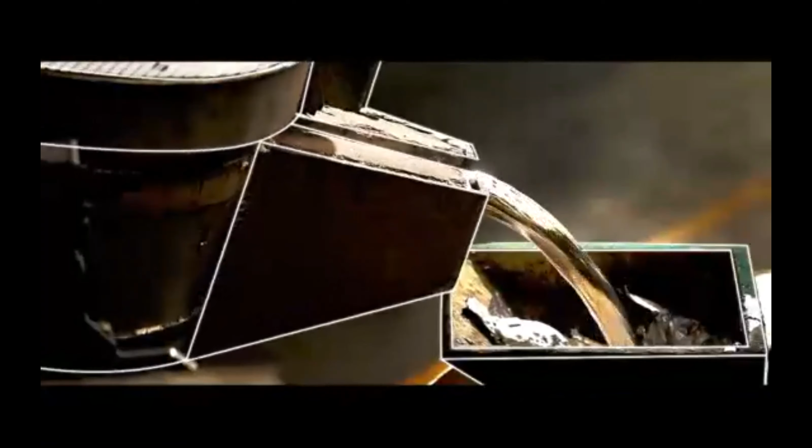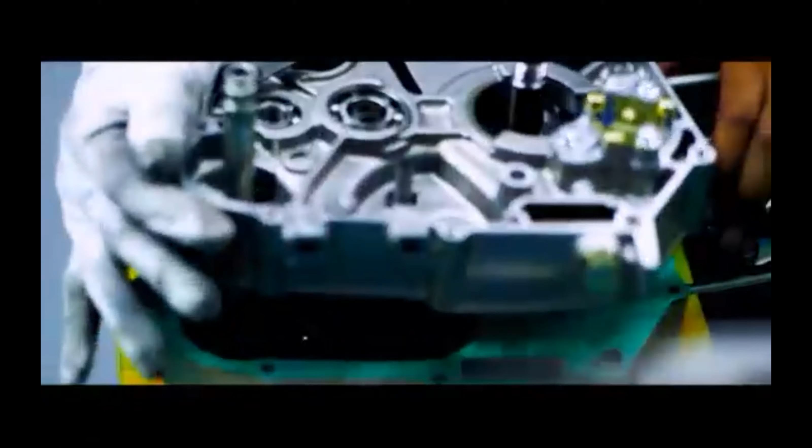With innovation in our DNA and progress as our legacy, we are the essential link connecting lives. A wheel driving people towards dreams. An engine empowering aspirations.

We are Rockman Industries. The legendary Hero Group, which has been a household name for over 6 decades, is among the most trusted brands in the world. As a founding pillar of the Hero Group, Rockman Industries today is a leading auto components and assembly supplier, and the largest manufacturer of two-wheeler alloy wheels in India.

With historic year-on-year growth and an ever-expanding geographical presence, our offerings have made us synonymous with link, motion, progress. The journey has been very satisfying and exciting throughout 5 decades.

When we started this company, there was a lot of import dependence. The company was formed to make India independent. I see this company to be a multi-locational, multi-product company now, taking on new materials and technologies which are going to be used in the future, like carbon composites or electrical cars or electronics, which will be used extensively.

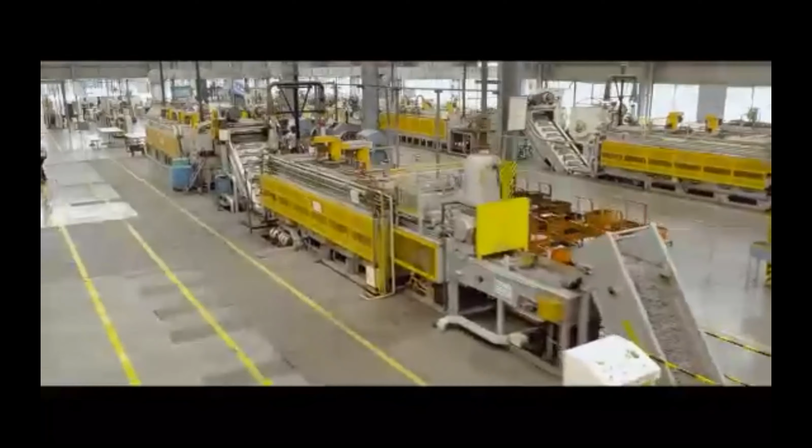Rockman delivers excellence in engineering products, services and solutions in the most innovative and cost-effective ways. With an eye on the future, our cost-effective advanced composites division is a one-stop seamless service. We take full ownership of our customers' needs with a single goal: to provide high-quality and cost-effective solutions to satisfy all needs.

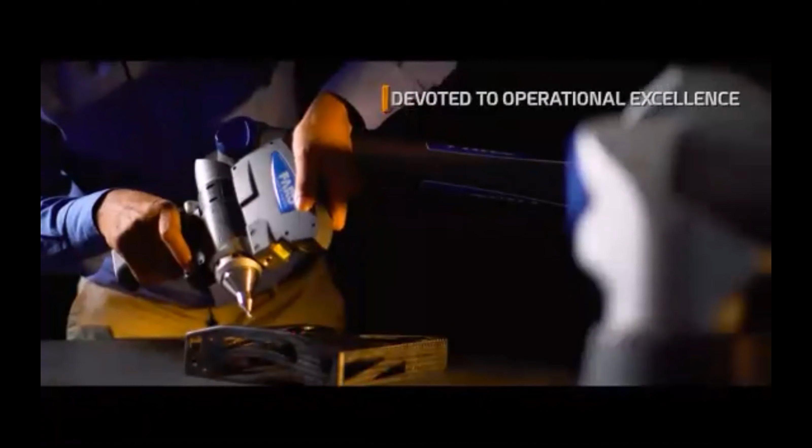Our strength comes from our technology. We follow robust systems and processes aligned towards all-round operational excellence, leading to an overall improvement in equipment efficiency, minimizing breakdown and creating a safer work environment. Our zeal for frugal engineering and our innovative manufacturing processes ensure a customer-first approach to technology.

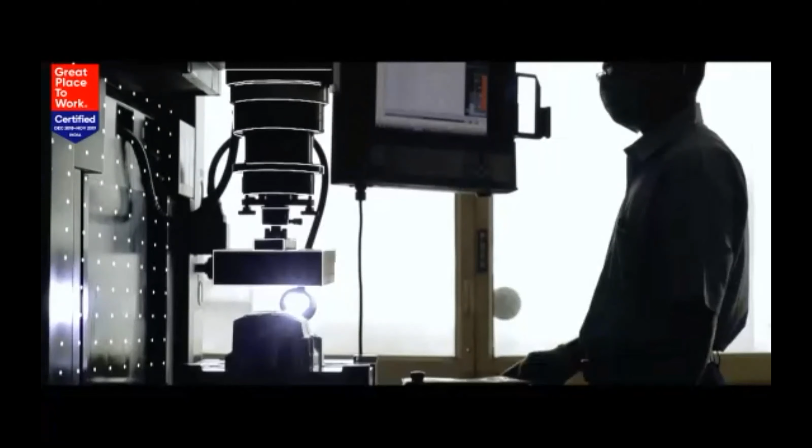Our true success comes from the combined brilliance of our workforce, our people. Their creativity and foresight catalyzes new ideas. By challenging the limits of today's technology, we develop products of the future. But our hunger for excellence craves for more.

At Rockman, we believe in giving back to the society, and we run a lot of initiatives where we are trying to work with the people for upliftment of the society there, working in the rural areas, schools, and we also run skill development centers where we provide free training to the youth who can be employable.

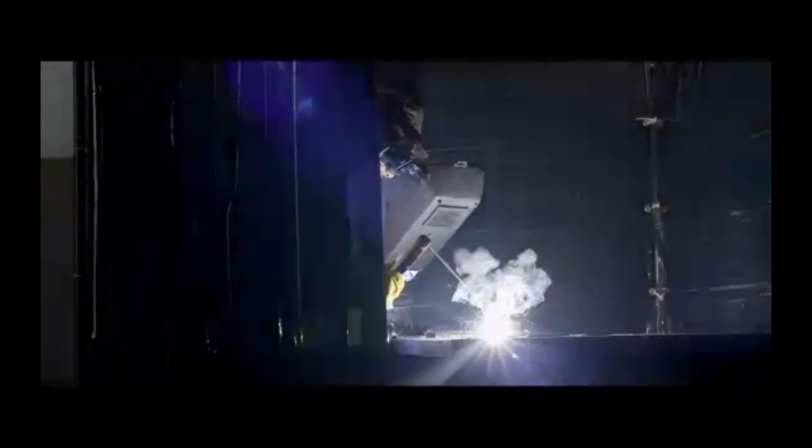To create solutions that educate, to instill values that empower, and to make a lasting impact on the lives of people. Simply to create better lives.

Rockman Industries. Link, motion, progress.